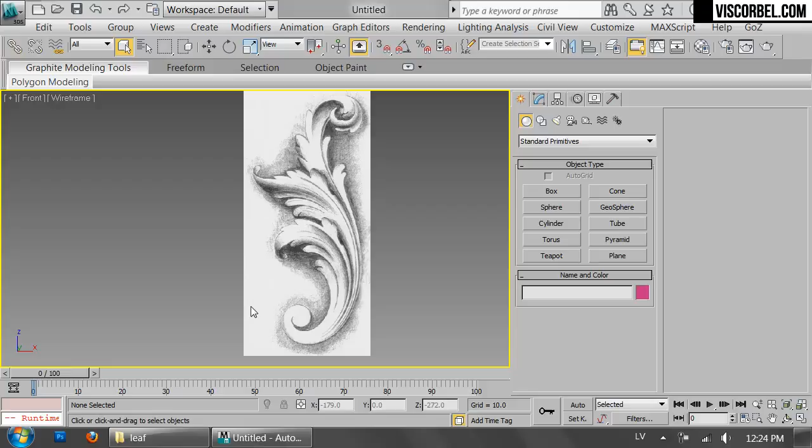Let's model some basic leaves. I'm gonna start with this little thing over here, just to show you the general idea.

So what you want to do is trace the outline of the leaf with the line tool. Trace it roughly like this, since the overall shape will be smoothed by the turbo smooth modifier.

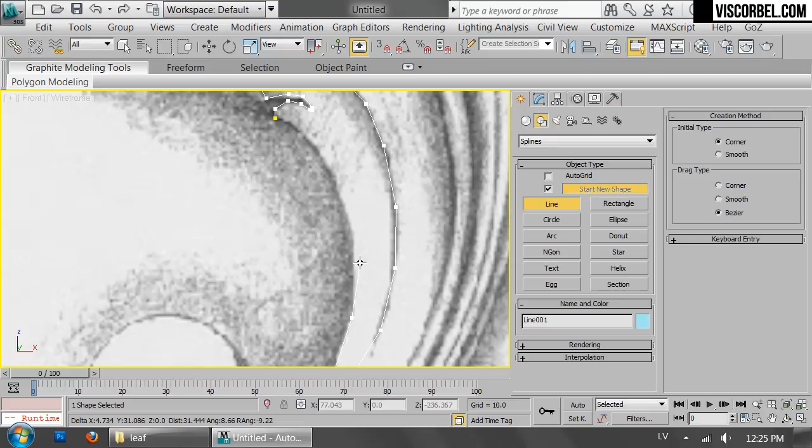When tracing, try to keep the point count or vertex count similar on both sides of the object, so you can easily connect them afterwards. Okay, so let's say we have something like this, and now we want to make it into a 3D shape.

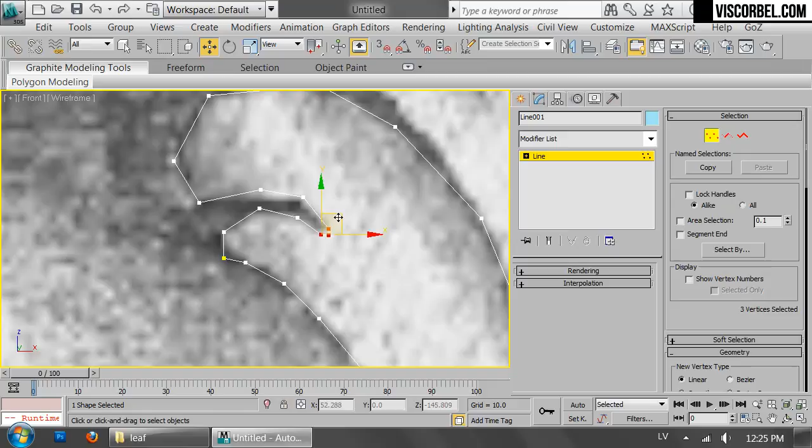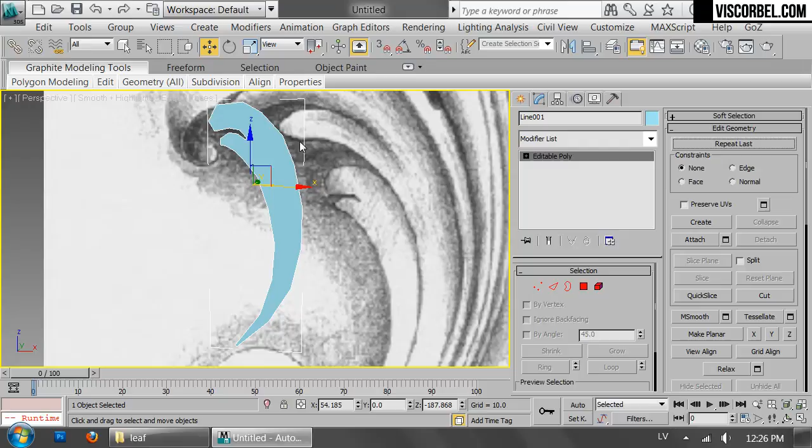To do that, first we have to check if all the vertices are set to corner type and collapse to editable poly. What we get is a flat piece of geometry with no edges in it, only the outside edges are there. The rest we need to cut in ourselves.

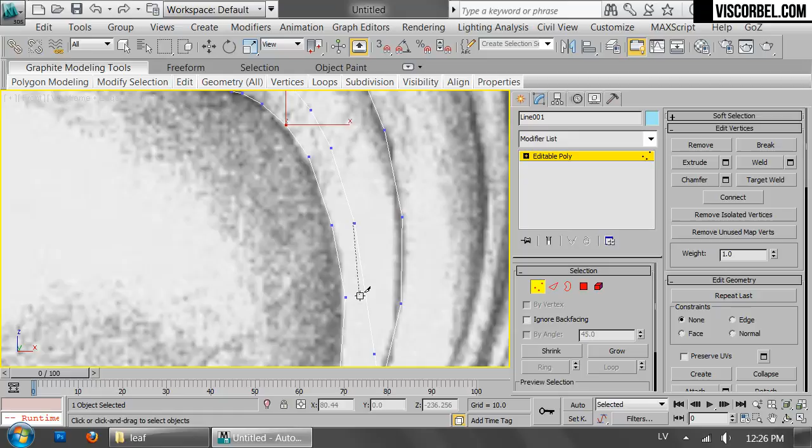Basically what I'm looking for is a nice grid, which can be achieved by using the cut tool, starting with the main lines of the object.

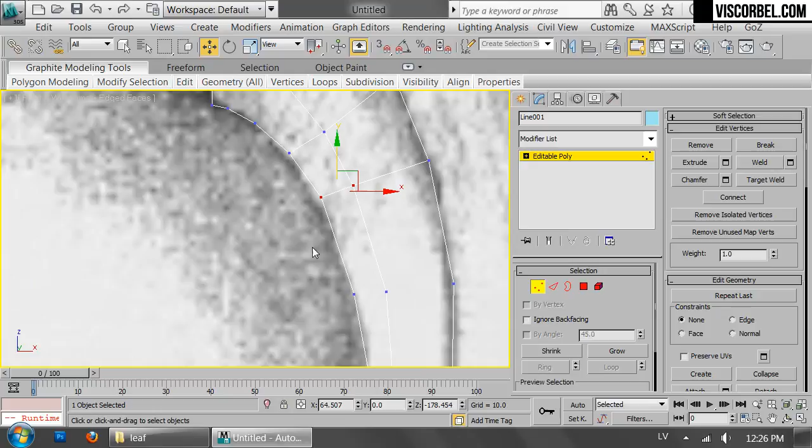You can also use the connect tool to connect the rest of the vertices. It's gonna be faster if you just use the keyboard shortcut, and you can set it up to whatever you want.

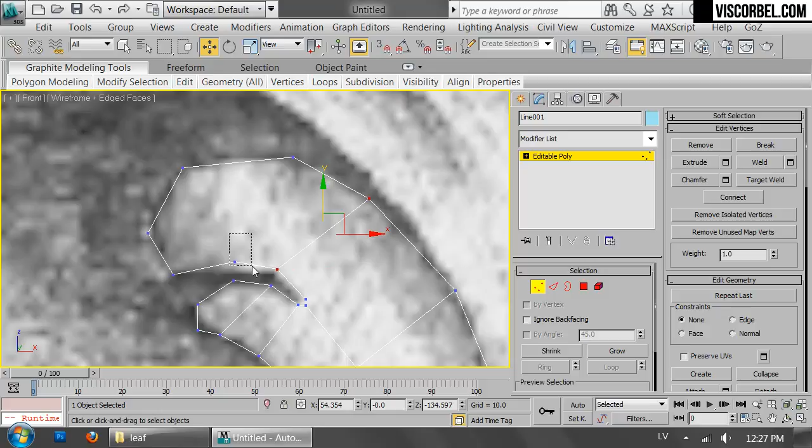As you can see, you can quickly go over it and cut in all these needed edges. My goal is to achieve a nice grid with all four-sided polys, and if it's gonna take too much time, I'm not worried about making some triangles or some pentagons as well.

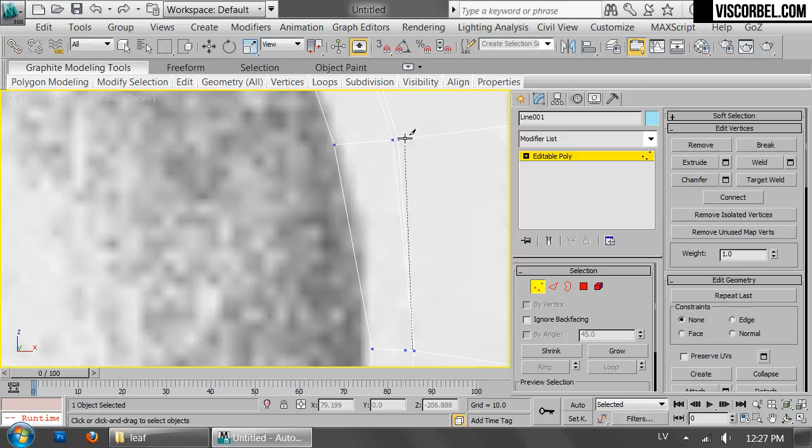So for example, here I'm gonna end with a triangle and cut on the other side of the edge. It's probably gonna be fine.

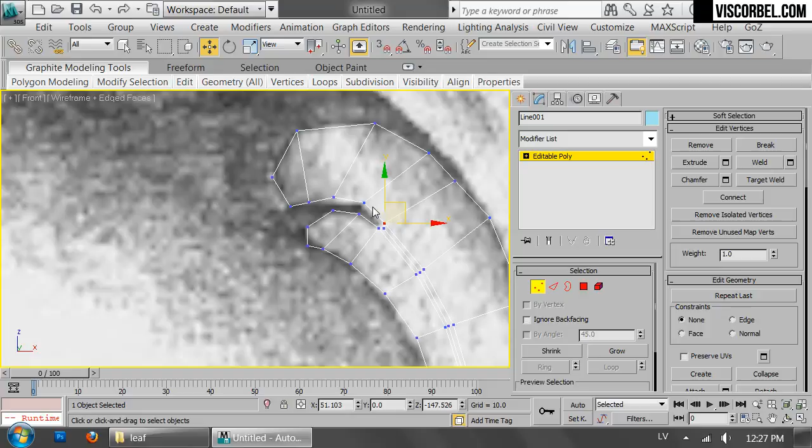I'm using some vertices close to each other over here, just to make a sharp corner there. I also want to add some edge loops in the middle of the leaf so I can give it a 3D shape by bringing those vertices outwards.

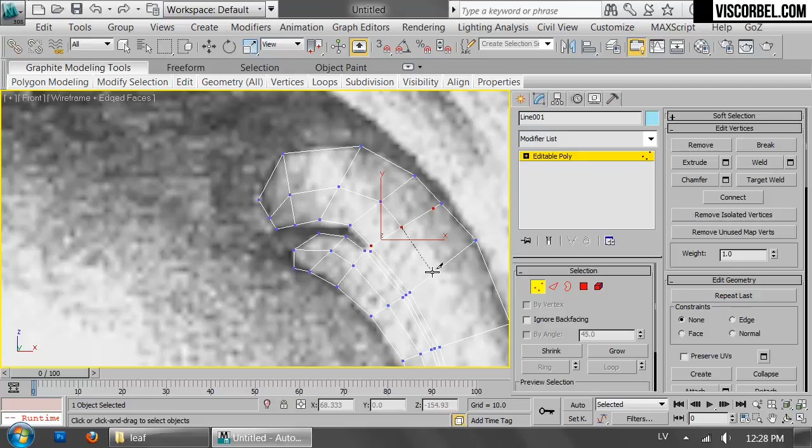And same here. That's pretty much going to be all the detail we need for this particular object.

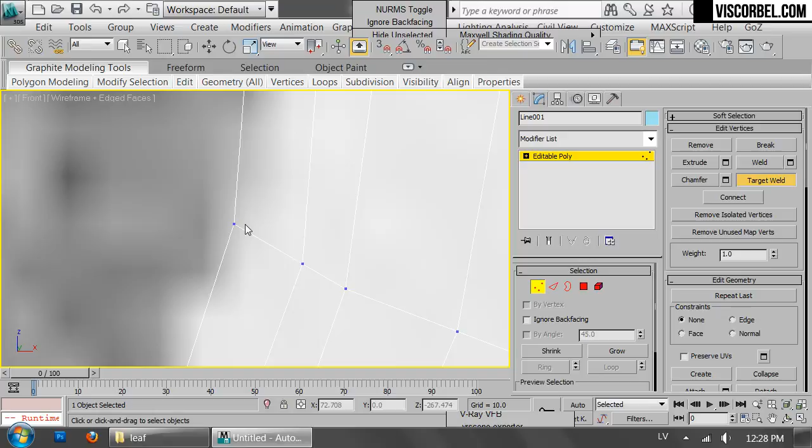Make sure no vertices are connected only by two edges. They have to have at least 3 edges coming out of them, except for these outer corners, which can have 2. All the inner vertices should have at least 3 edges coming out from them.

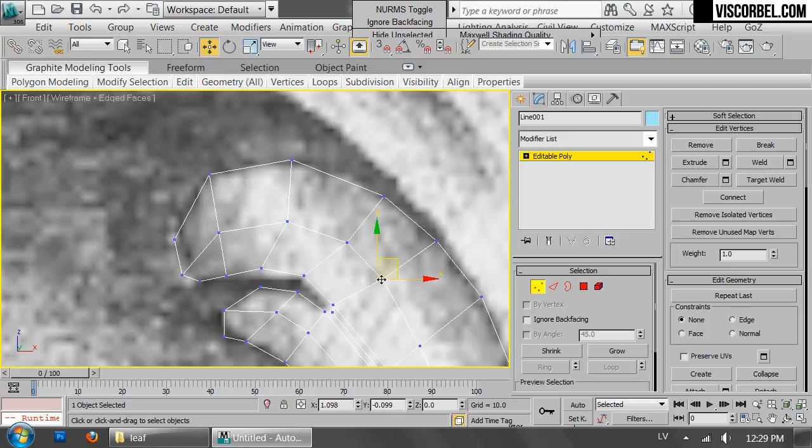Make sure the shape is nice and smooth. Let's add the TurboSmooth modifier to check the shape.

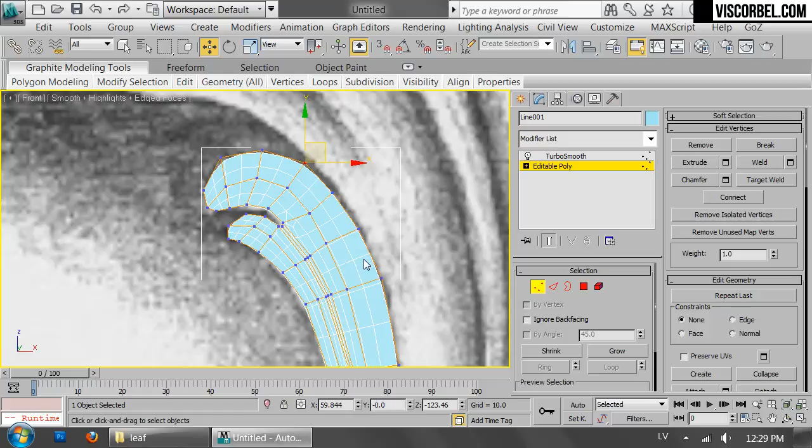You can fine-tune the vertex positions by turning on the preview and moving them until you get a perfect rounded shape.

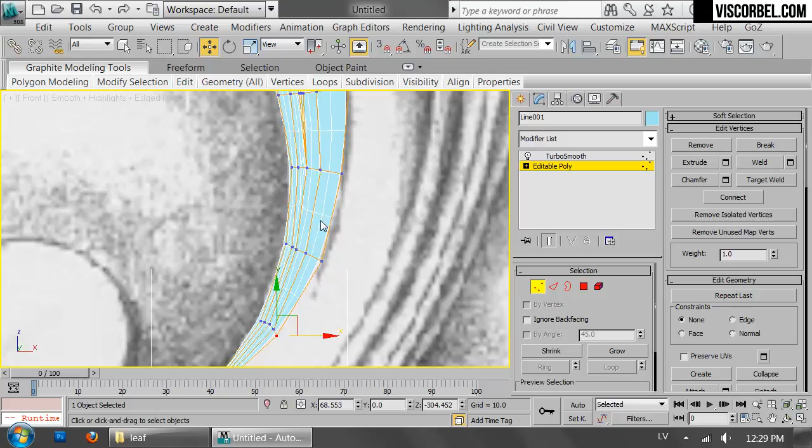So I think that's nice. Maybe let's taper the bottom a bit more, make it a bit thinner. Okay, and that's nice.

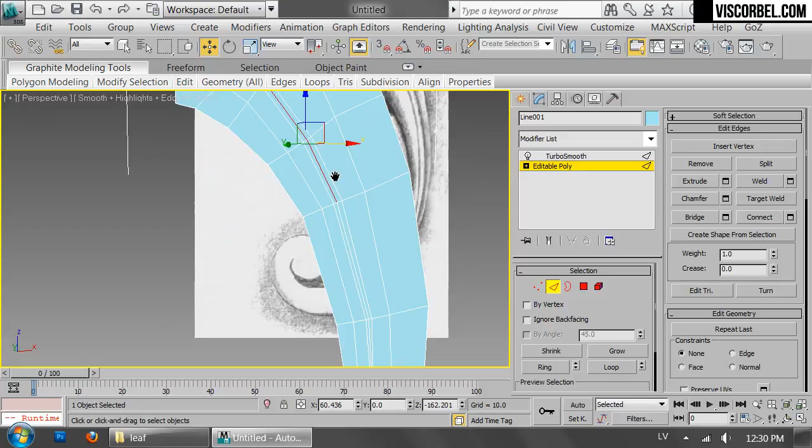Now we have to make the thing 3D. So what I'm gonna do is select some of my edges. Let's make a crease here by moving these edges inwards.

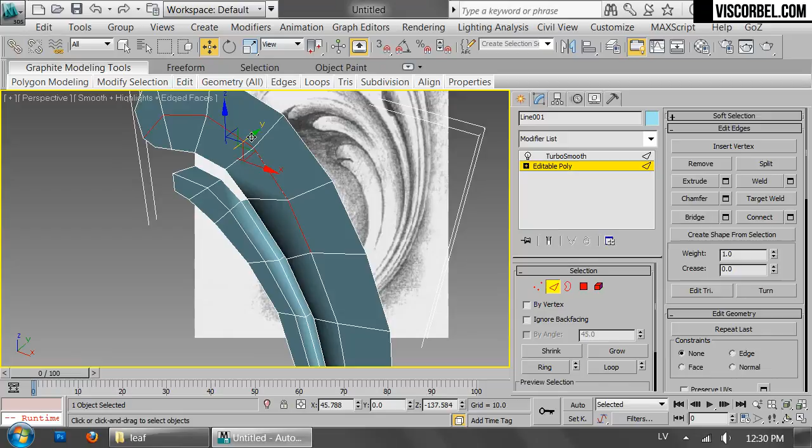Alright, like that. Then I'm gonna move these edges out. Nice. And move these edges out as well.

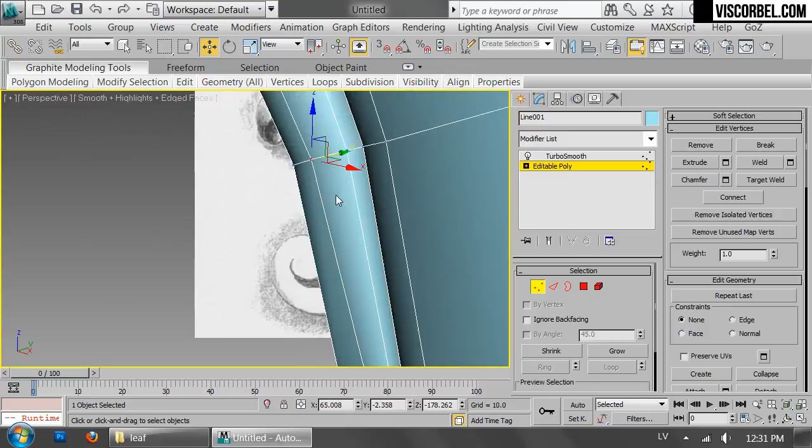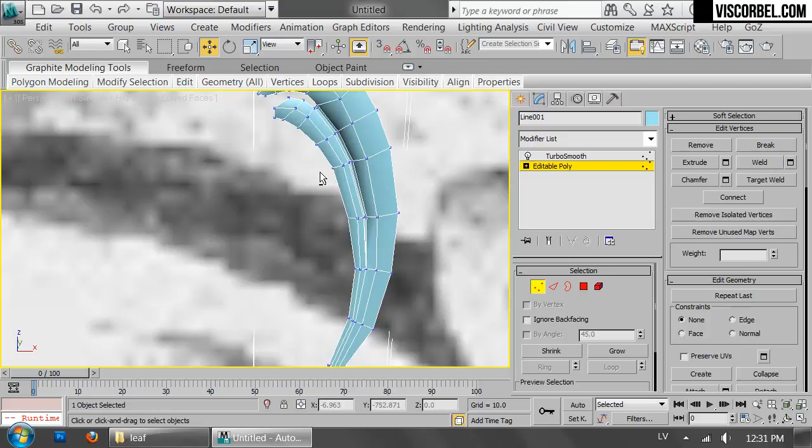Just try to make a nice three-dimensional shape for the leaf.

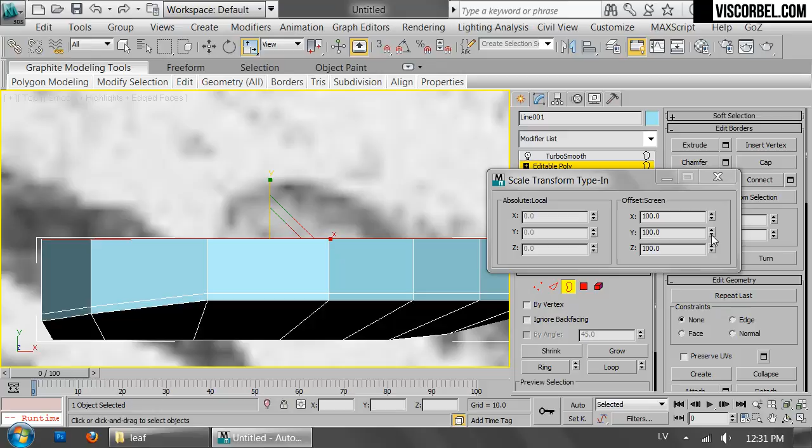Once you've done that, you can select the outline and Shift plus move it from the top view a couple of times to extrude it like this. Finally scale it down the y-axis, or you can right click on the scale button here and right click on the y-axis little arrow over here, and it's gonna flatten this outline, make it completely planar.

And that's a very basic, very simple leaf you have there.

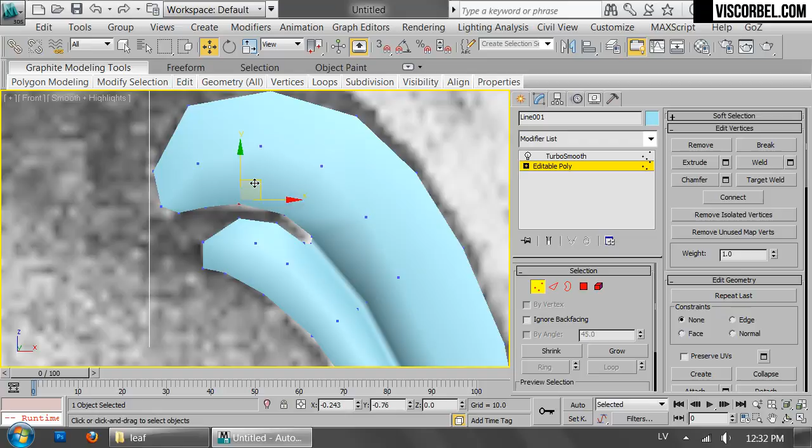This is the same technique I'm gonna use for all the more complicated versions or examples. The basic idea is gonna be just the same.

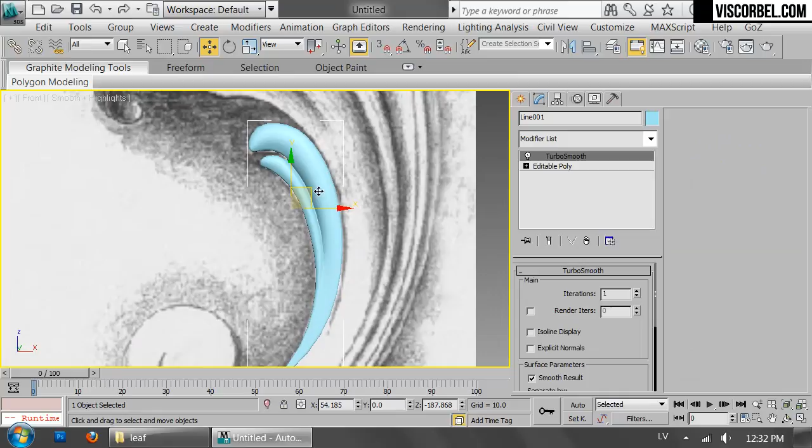If you don't like these open faces on the bottom, I mean on the back, you can just add a cap holes modifier above the TurboSmooth, and it closes it up nicely like this.

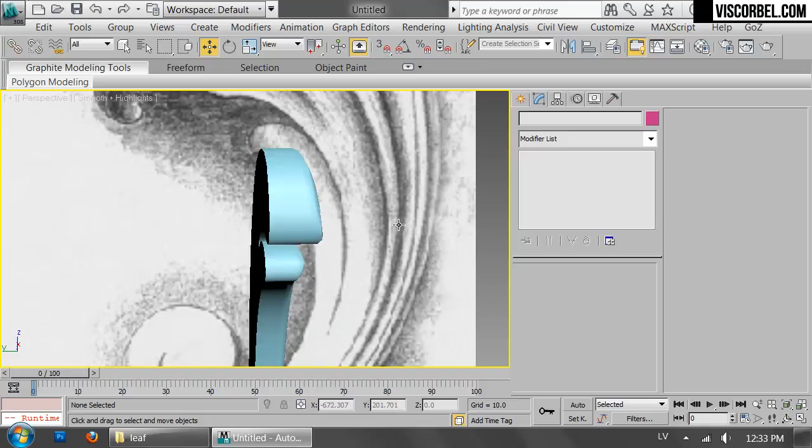So that's the general idea on how to make some simple leaves, and you can use the same techniques for more complicated examples as well.

If you want to make the shape a bit more interesting, you can add an edit poly above the editable poly, just to make sure you don't mess up the original.

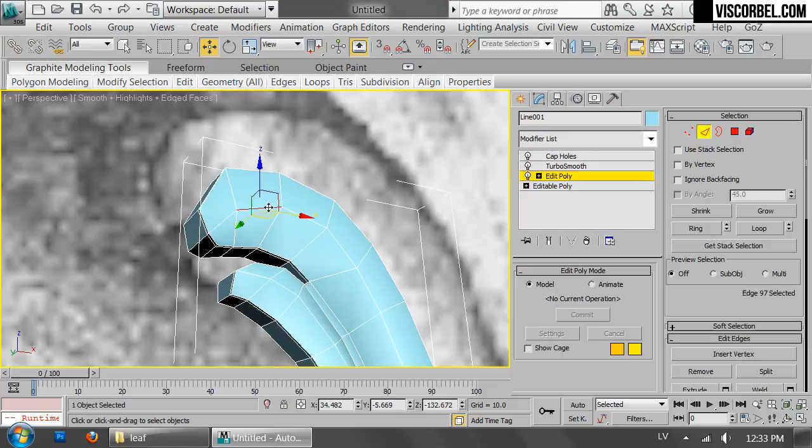And maybe I'm going to select the edge loop, make a crease here by chamfering it.

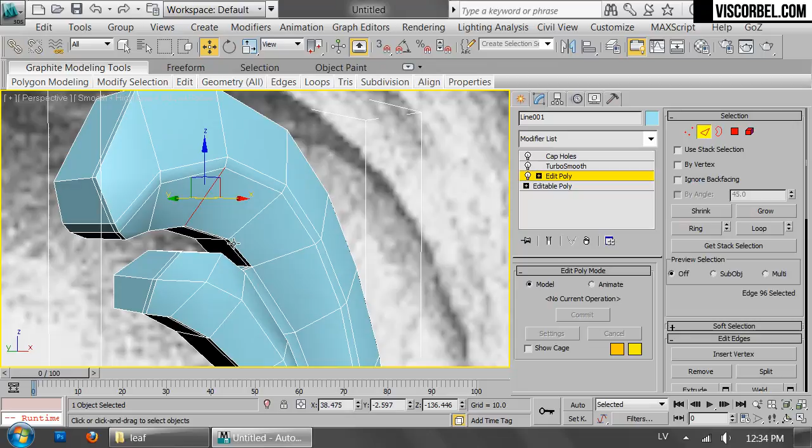Right, and maybe let's adjust it a bit further. Let's say I want to make this part a bit rounded towards the inside. So select the edge ring,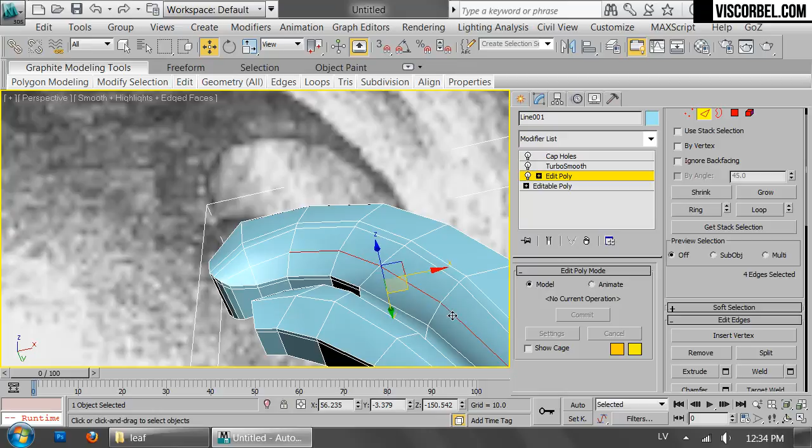and use the Flow Connect to make a nice smooth connection. Finally select some of these edges and move them inwards.

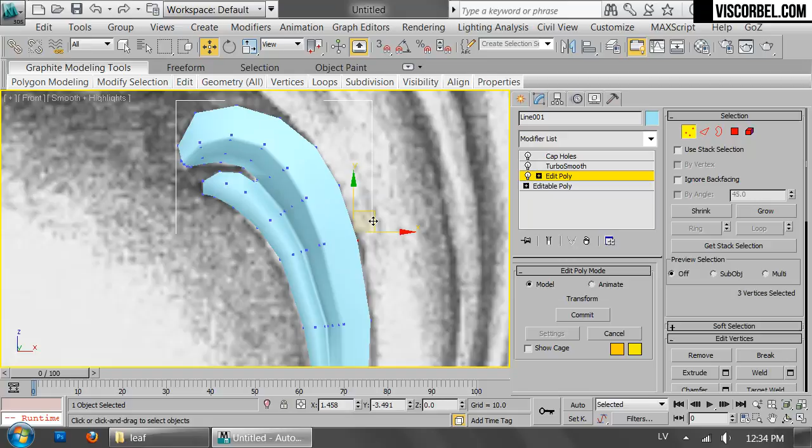And the shape is a bit more interesting now. Maybe let's fine-tune this part.

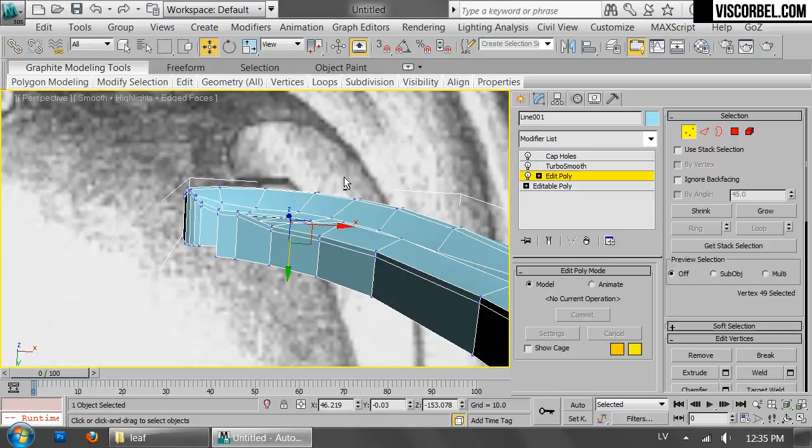Alright, so it's a bit different from our reference photo or the reference drawing. I think it looks a bit nicer this way.